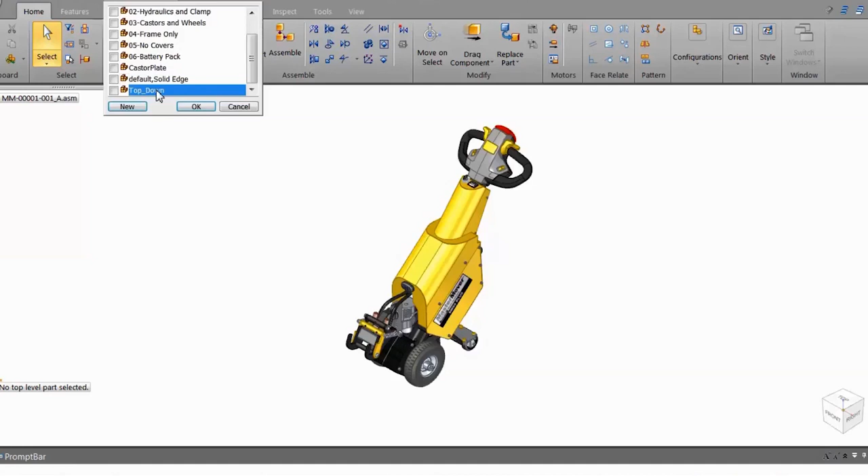The Create Part in Place command allows creation of new parts or subassemblies within the context of the assembly. Once started, it prompts to specify the location to save the new file. Simply type in a name and click Save. The new component is immediately added to the Pathfinder.

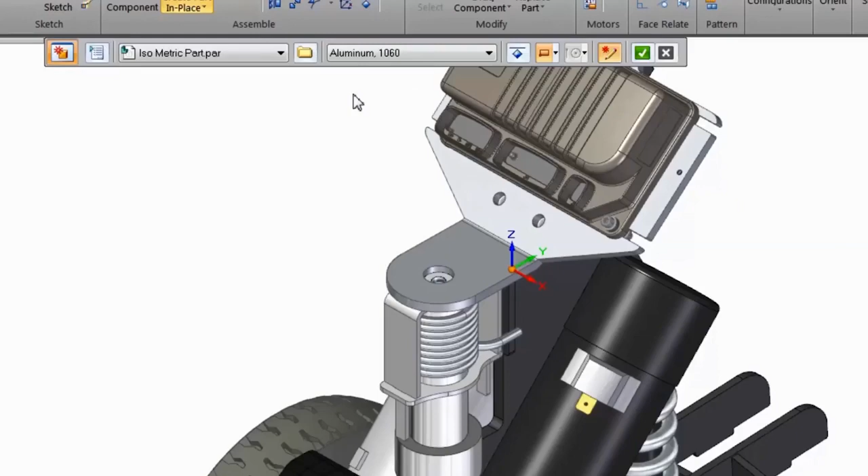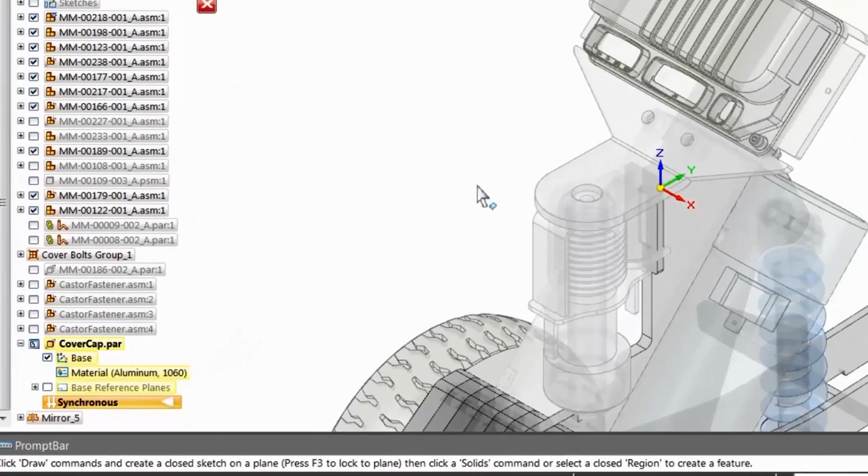There is an option on the Create in Place dialog to immediately take you to the component after creating it to begin to model geometry. The advantage is that you can create geometry by referencing the background components of the assembly to ensure proper fit and function. You can toggle the display of the overall assembly in the background by pressing Ctrl-Q.

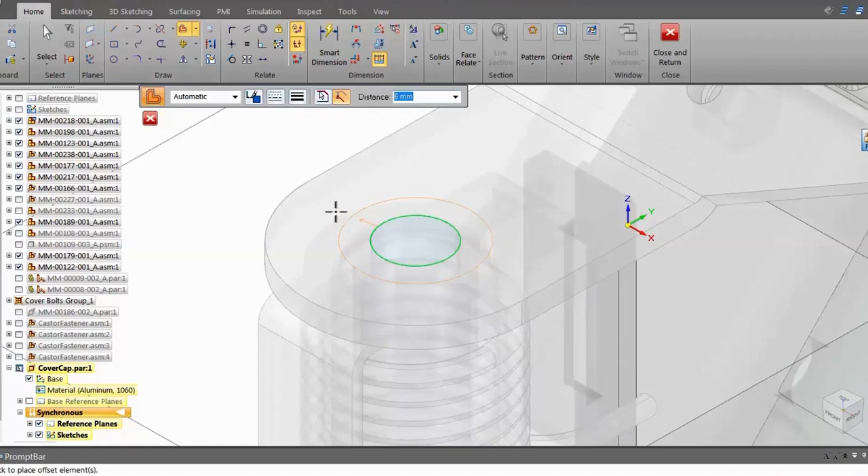When defining the location for the new part, we strategically selected a key point where we wish to begin the design. The Project to Sketch command helps in creating new 2D geometry by referencing elements from the existing components of the main assembly. You can also use the Offset command to add more geometry without having to actually create new 2D entities explicitly. This gives you regions which you can select to produce 3D objects for the new part.

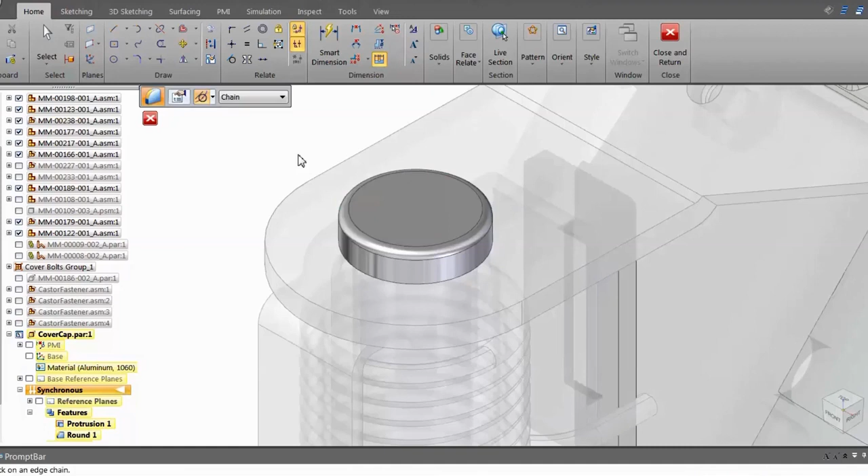Next, you can continue using regular 3D part editing commands, like adding rounds on the part still within the context of the assembly. Then create a thin wall to hollow out the cover cap. In this case, the bottom face needs to be selected as the face to remove.

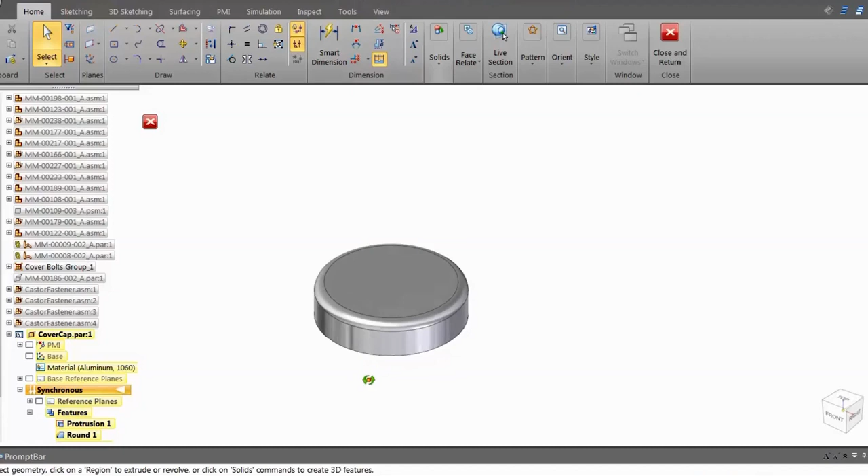You can once again use the Ctrl-Q key combination to quickly hide the main reference assembly out of your way and pick the face. Once the thin wall command has finished, pressing Ctrl-Q gets the reference assembly back into view.

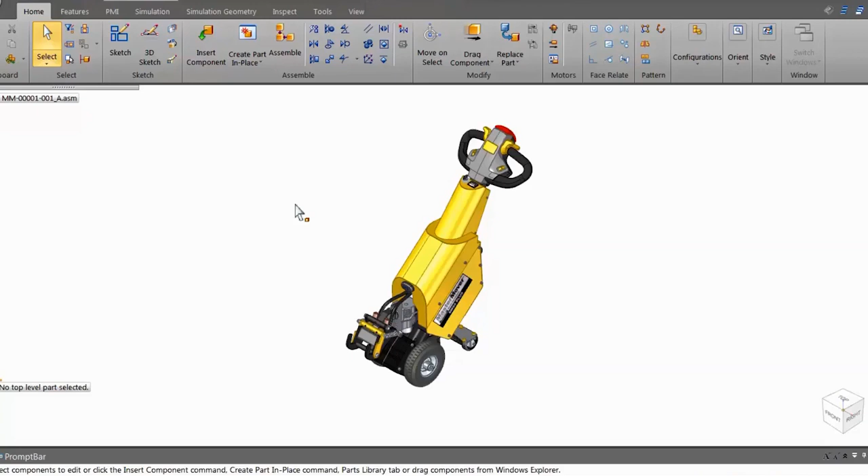Finally, you can close and return back to the main assembly where you began creating the part in place. This is a top-down assembly modeling approach in Solid Edge, which reduces the design cycle length and eliminates fit errors by taking better advantage of common part geometry.